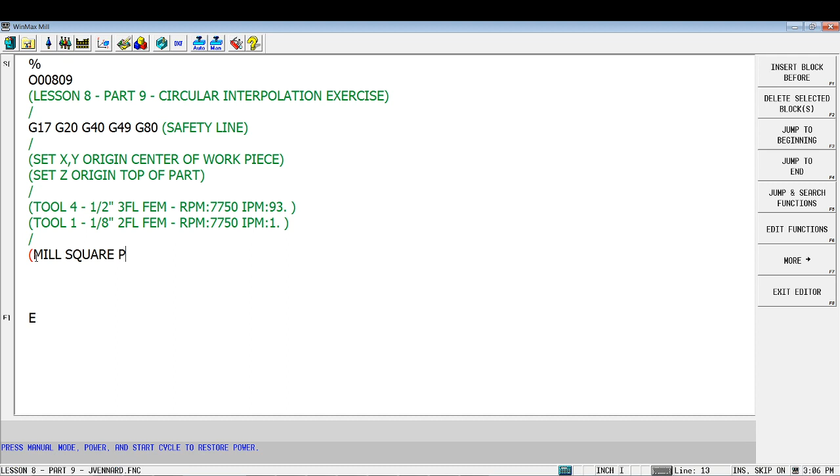Mill square pocket first. We'll just put that, mill square pocket first. For the tool, we're just going to take this tool setup information right here, and I'm going to copy the tool 4 info and paste it there again. And then we'll go ahead and get this tool to the spindle.

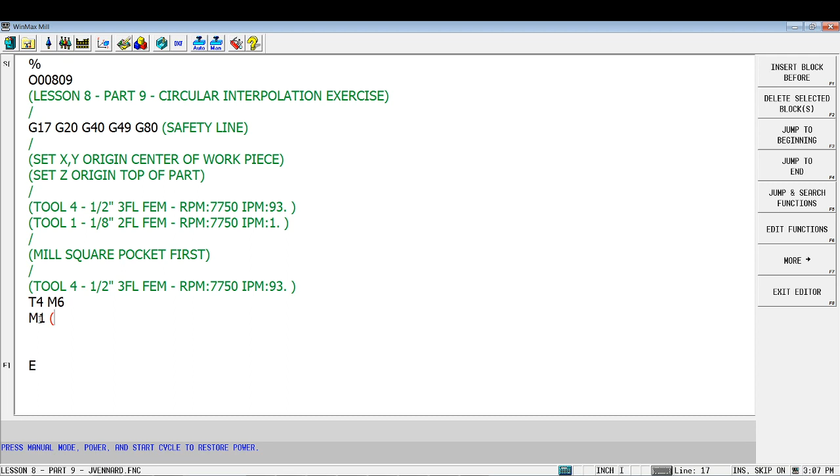T4 M6, right? A T4, that's tool 4 with an M6 telling it, do a tool change, move that to the spindle. We're going to go ahead and do our M1 optional stop, and we're going to verify our correct tool. Okay. You know, the first setup, we always want to take a look and just make sure that tool's the right one for the job.

After we've got the tool verified, now we will go ahead and bring the tool down to a location for a start point. So that being said, let's go ahead and take a look at our plotted out points here for this part. Okay. Here's the contour points. Like I said, we're going to do the contour first, and then we are going to do the holes. So I got my holes up here, I got my contour here. Now this is straight out of the answer key.

Notice that it's got leading zeros in here and there's no point after the zero. And I know some people have reached out to me and said, hey, I didn't put my decimal point. I put it in the instructions. You got to have your decimal there. Okay, the machine requires it, so I require it. So make sure that if it's a 0 is your location, it's 0 point. And any of the rest of them, no trailing zeros. Okay, so like this 0.750, that 0 is not necessary. So we don't need to put those trailing zeros on there, or the leading ones for that matter.

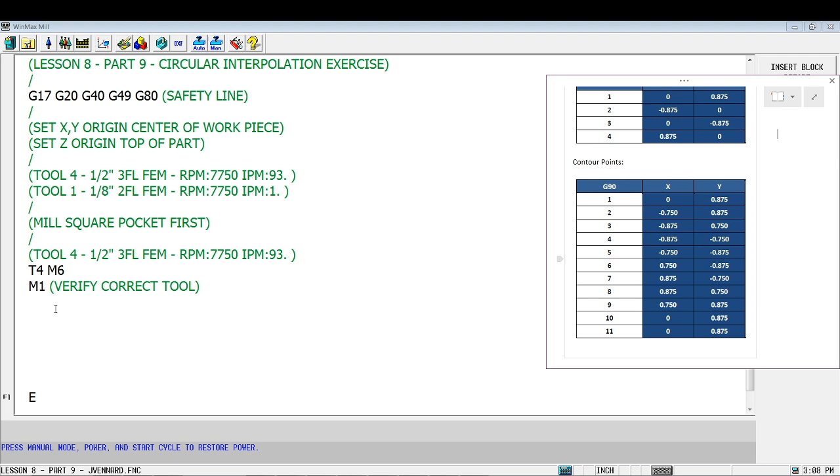All right, so moving forward, what we're going to do is we're going to move to position 1 right here. Okay, that's where we're going. So I'm going to tell it here, I'm going to do a G90, G54, G0 to X0, Y.875. Okay, everybody good there? That's that position 1. That's where we're going to. Okay, going to this point, this position 1 right here. All right.

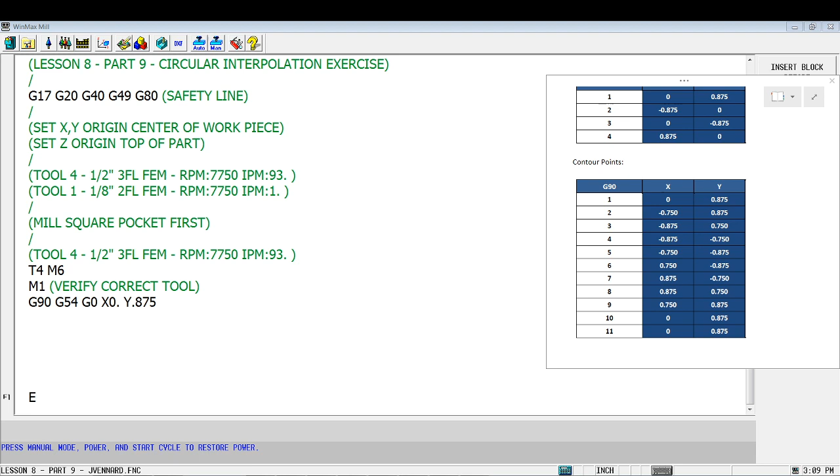All right, so that's going to be a good place for us to check our tool out. So that's what we're going to do there. We're going to go ahead and get to that location. We're going to tell it that this is our start position. And we're going to check our tool. So that's what we'll do now. We'll tell it, hey, we're going to do a G43. What's that? Tool length compensation, right? And along with the G43, we've got to have an H4. Tool 4, tool length 4, H4. So we have to put that in there.

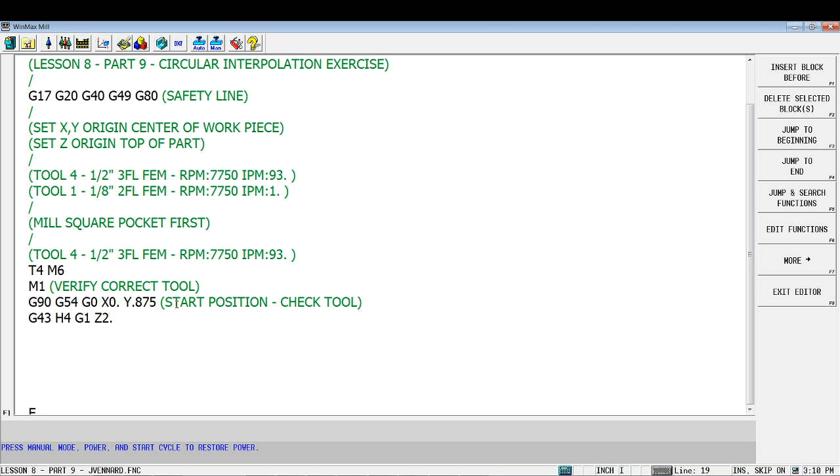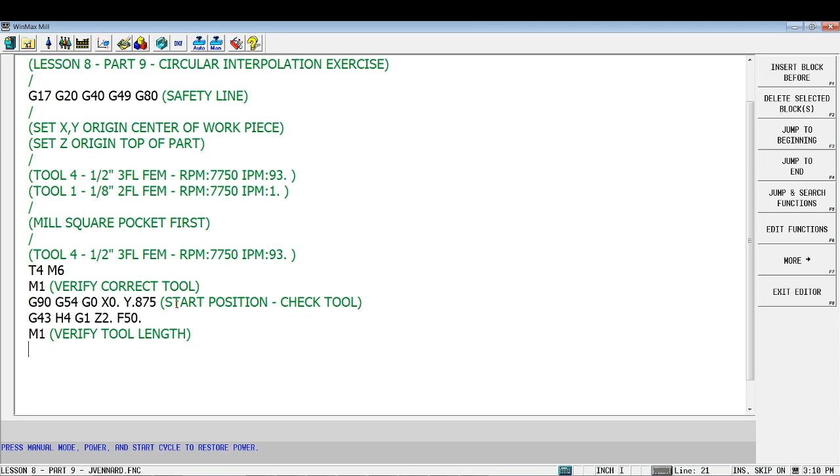We'll do a G1 down to 2 inches above our part, and let's just set the feed at like 50 inches a minute. Then we'll do our op stop, and we'll verify tool length. Okay, that looks good. So once the tool length's good, and we've checked it with our 1-2-3 block or whatever we might use, now we can go ahead and tell it to turn the spindle on. So S7750 M3. That's telling the spindle to turn on clockwise. So that's happening. We're good there.

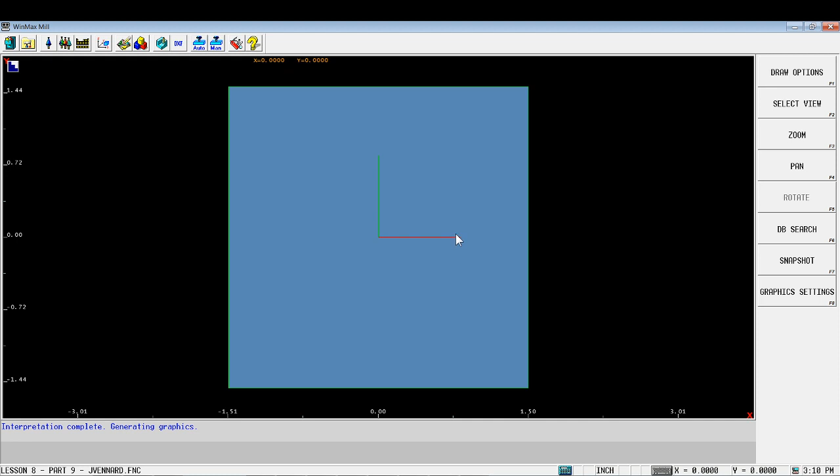We're still above the part, so at this point, even if I go to my draw screen and try to draw it, nothing's happening yet. Okay, we can't see anything. We're just sitting up here above the part right now. That's all we've got going on. But no fear, a couple lines from now, we're going to start seeing some activity. So let's go ahead and we're going to plunge on down to 100 thou above the part and turn on our coolant.

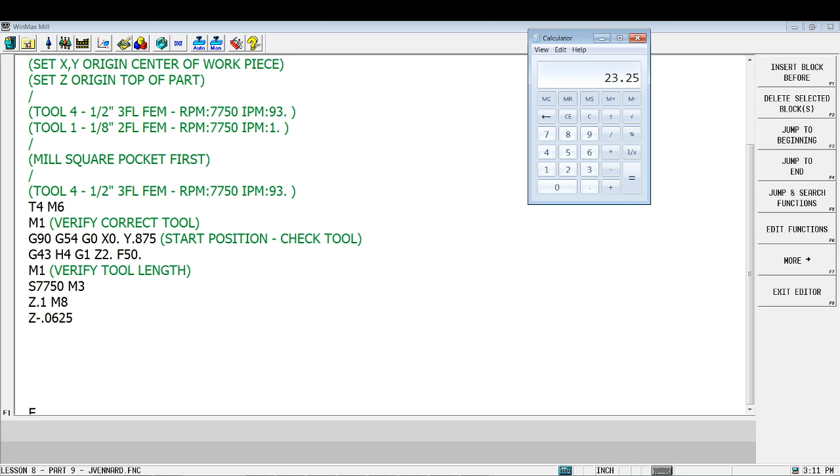And then we will go ahead and plunge to our depth. So we're going to do a Z minus 0.0625, minus a 16th, Z minus 16th. And I'm going to slow the feed rate down. So my rule of thumb for plunging in material, who remembers it? Probably no one right now. So the rule of thumb is your contour feed rate, 25% of that, or 10 inches a minute, whichever one's less. So in this case, 10 inches per minute since 23 is what it calculated to. So I'm going to calculate to 10 inches per minute, and this is just a safe plunge feed rate.

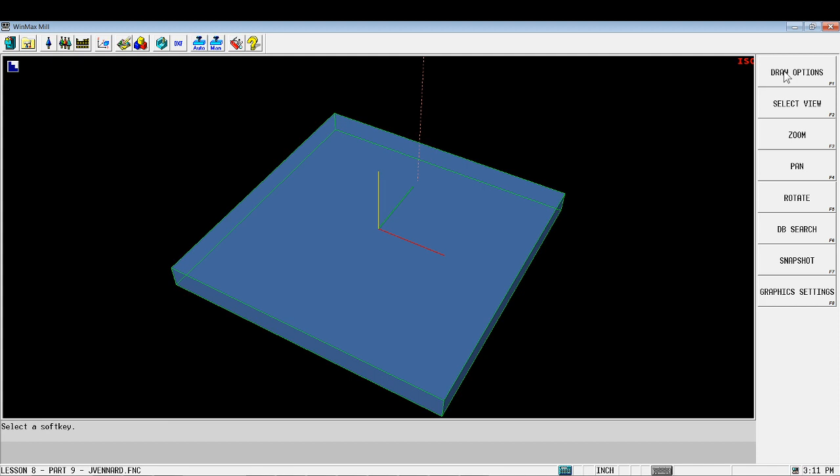Plunge to depth for square contour. Alright, now if we draw this, we should see it has plunged into the part right there, down the 16th deep.

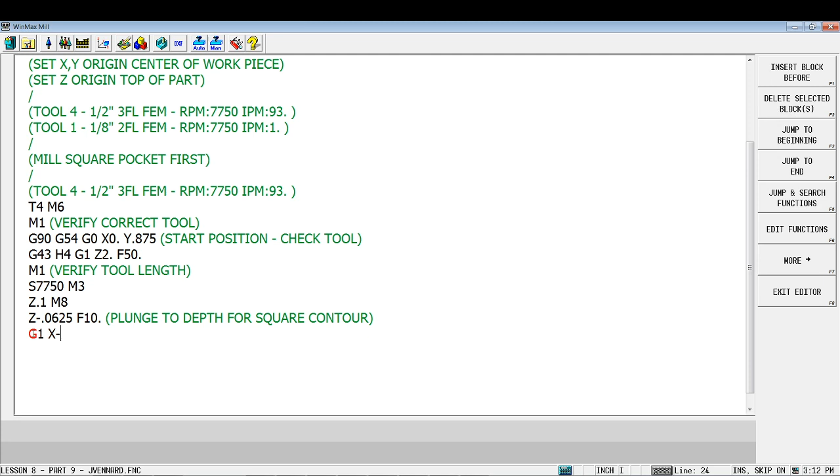Alright, so from here we're basically going to work our way around this part. The next move, we're going straight to the left on this part. If we look at our coordinates, open those up again here. They are basically telling us that we're staying at the same Y, but we're coming straight over to X minus 0.75. So we're doing a G1 X-0.75, and we can bump our feed up to 93.

And that gets us to position 2. Draw that. There's our mill move. Now we're milling an arc, right? We're going to be doing a corner now. If we take a look at our part, we're to this point right here, and now we've got to make this corner. So that's going to be a counterclockwise arc, so a G3. That's what we're going to plug in here.

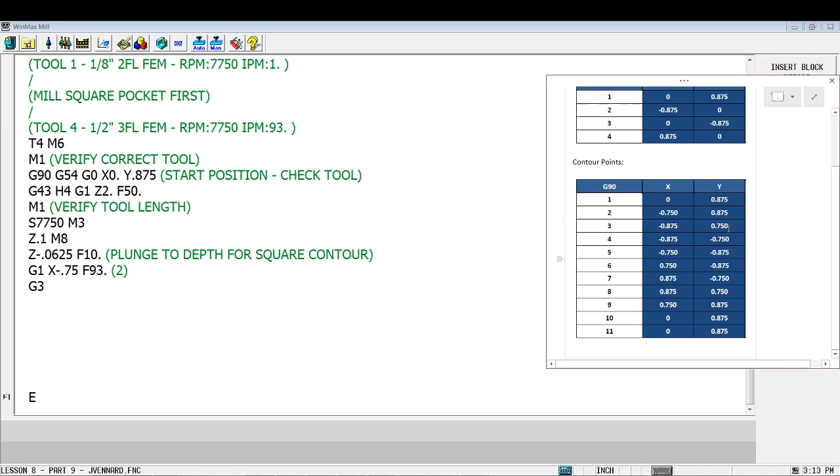We're going to do a G3, going to our next position. Our next position is X-0.875, Y0.75. This is position 3. So X-0.875, Y0.75. And then we need to decide, are we using an I or a J? What's our value here?

Well, the start of rotation, when we look at this part, is up here, and from the start of rotation to the center of rotation, it's in the negative Y direction. That means it's going to be a negative J since it's a Y value. And the amount is basically the radius of the corner minus the radius of our tool, because we're on the inside of the corner.

So 0.375 minus 0.25, the radius of our tool is a quarter inch, so we would subtract that from the actual radius, so it's going to be a J-0.125. J-0.125 here. That's going to get us to position 3. We draw that. There is our corner. Now we need a straight linear move coming down to position 4.

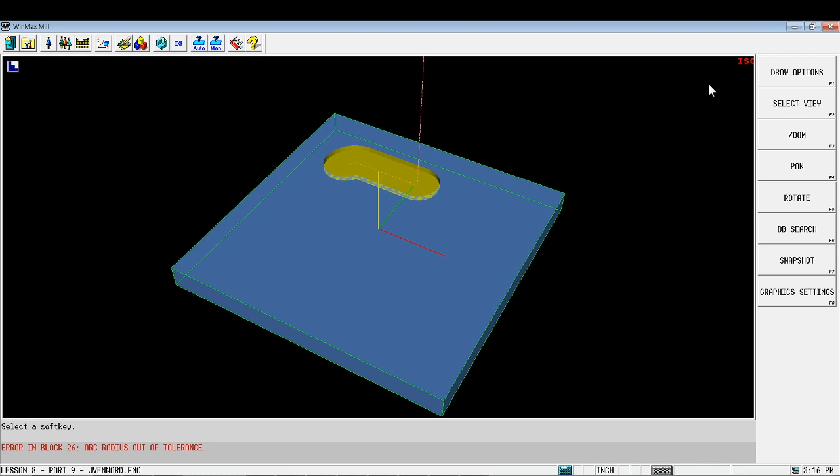So go back to our program, and we're going to have an I0.125 here. Can draw that. And there is our next corner. From there, we're going straight across again. So G1 over to position 6, so to X0.75.

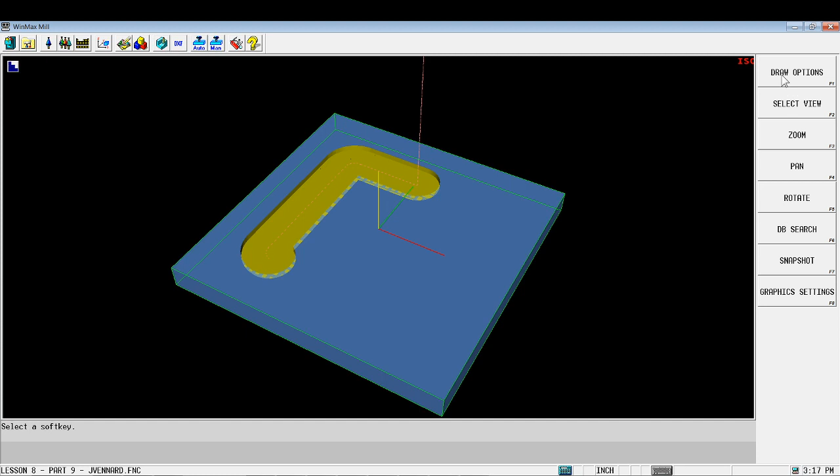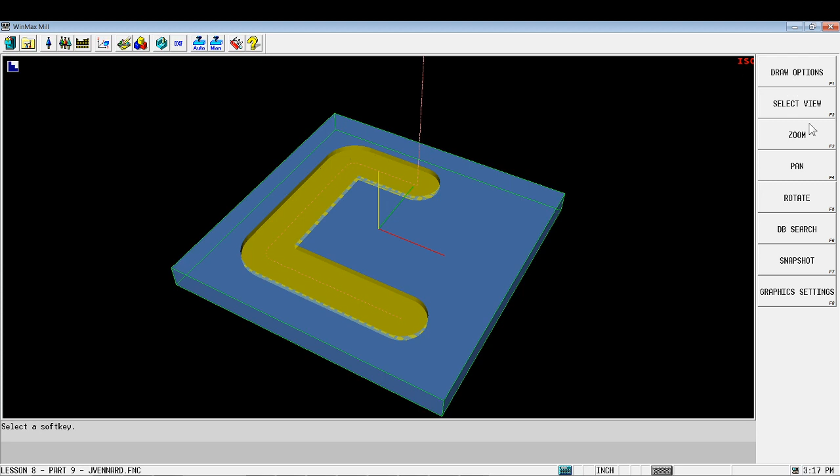There we are. Then we've got another G3 going to position 7, so X0.875, Y-0.75. And this time we have a J0.125 because from the start of rotation to the center of rotation, it's in the positive Y direction, 125 thousandths. So that's a J0.125. Look at that. We should have our next corner in. There we are. Looking good.

Couple more moves. We've got to go back to our G1 here, up to Y0.75. That's position 8. And then another G3 to X0.75, Y0.875. This time it's going to be an I-0.125, because from the start of rotation to the center of rotation, it's in the negative X direction. Since it's the X direction, that's an I. It's a negative, and then the radius, subtract the tool radius, 0.125.

And then from there, we'll do a G1 right back to where we started at X0. And that gets us to position 10. If we look at this, we have our completed square. Okay, so that looks good. Now, pretty much it's just a couple more lines of code to go ahead and mill this now.

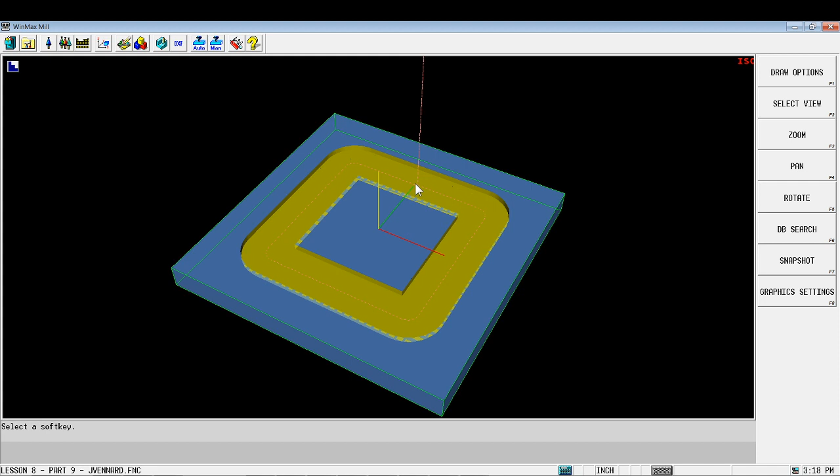So let's go ahead and perform the milling operation for the circle. I guess I should say that. We've already milled the square, now we're going to mill the circle. The first thing we got to do is we got to go on down to depth. So this is going down to G1 down to Z minus 0.125, another 16th deep, and I'm going to slow the plunge feed rate to 10. Plunge to circle depth. If I look at my part and draw this, you see here I've plunged on down deeper into my part. Okay.

And then it literally takes one line of code here. We're telling it a G3 because we're going to go counterclockwise. We're going to start and end at the exact same position so our X and Y's aren't changing, so we don't have to put any of those in. All we've got to do is tell it the direction we're rotating, and we've got to tell it our I or our J value. So let's take a look at this part here.

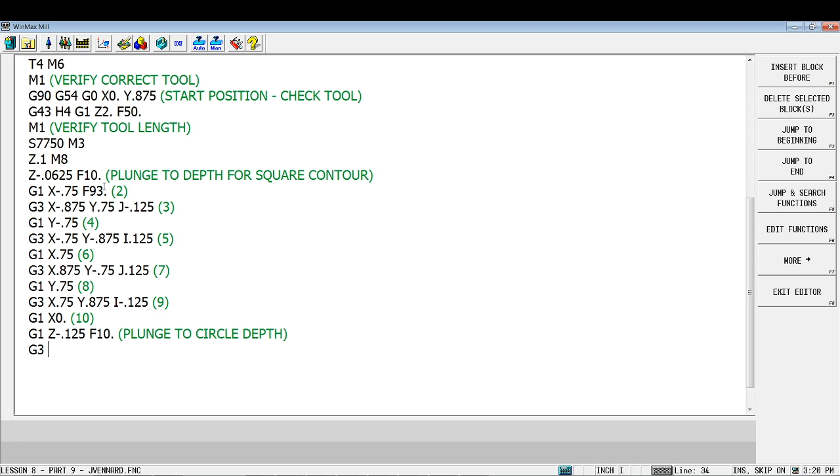We're starting right here. This is where we're at. Okay, so it's from the start point to the center point of rotation. So if this is the start point, and that's at Y 0.875, to the center of rotation, which is 0, it is in the negative Y direction. So it's a J negative 0.875, because that's the distance from the start to the center. 0.875. It's in the Y negative, so it's a J negative 0.875.

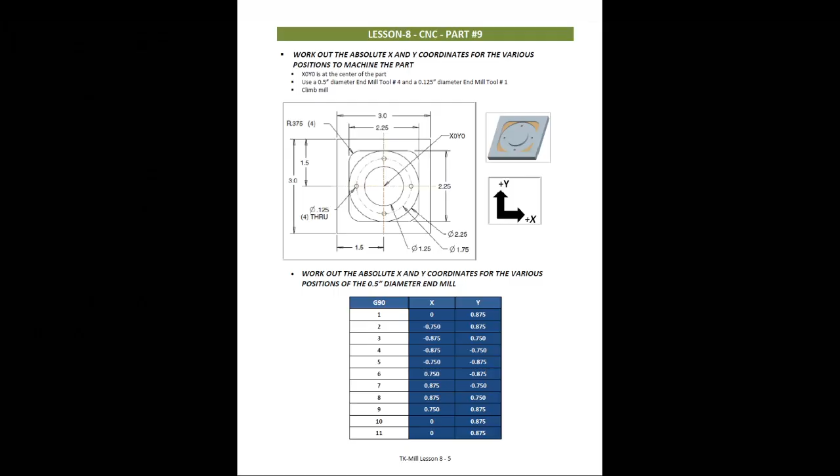You guys don't want to see me again.

All right, so it's a J negative 0.875. And this is mill circle. Now that's the one thing you do need to know. Anytime we do a full circle like this, you can only use I's and J's. Okay, you can only use I's and J's, which is what I want you to primarily focus on right now. Later, I will teach you how to use radius values a little differently, but right now, I's and J's in all your programs. So if we look at this, there's our circle milled.

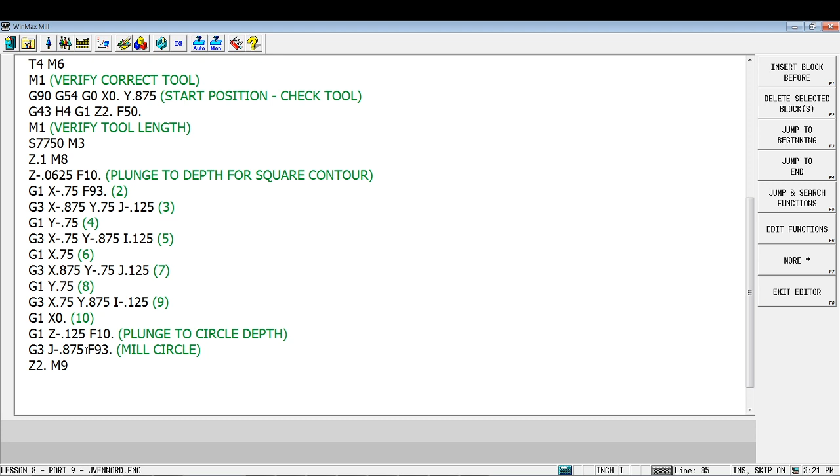Looks good, doesn't it? Now we just got to come up out of the part. So we could also, if we wanted to, bump the feed rate back up to 93 to mill the circle. And then I'm going to tell it to come up 100 thou above the part. And then, actually, let's go 2 inches above the part. And we'll shut the coolant off. And then we'll tell it, let's bring our spindle up to the home position, G28, G91, Z0, and we'll shut the spindle off.

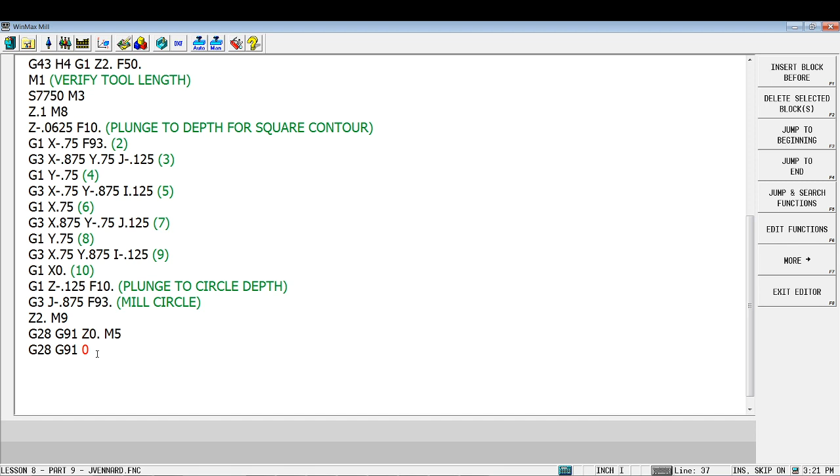And then we'll go ahead and bring this part to us so we can take a look at it. It's going to bring it to the center. Move home through reference position. Okay, so that has our part milled. So we can draw that, and that looks good. And what I would recommend you do now is definitely go up and save your file if you haven't saved it yet, because we're ready to go ahead and plunge the 1/8 inch holes. So let's go ahead and do that.

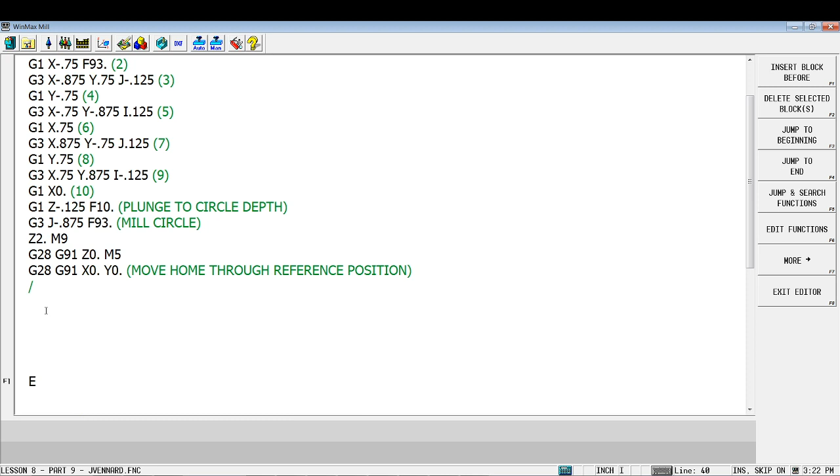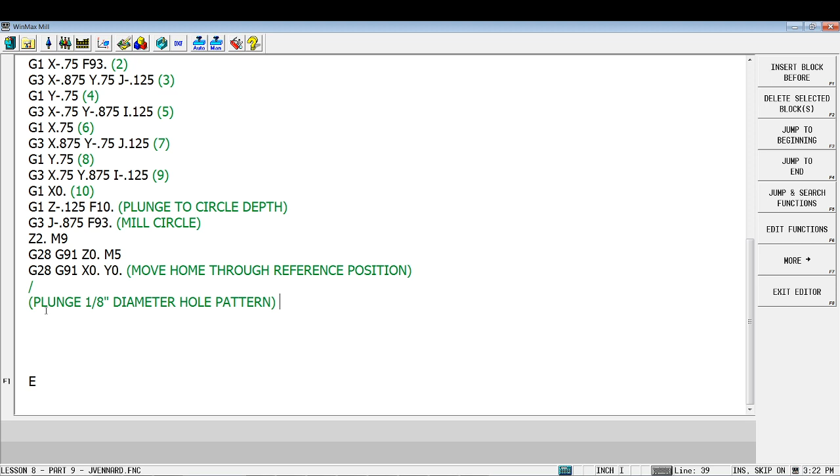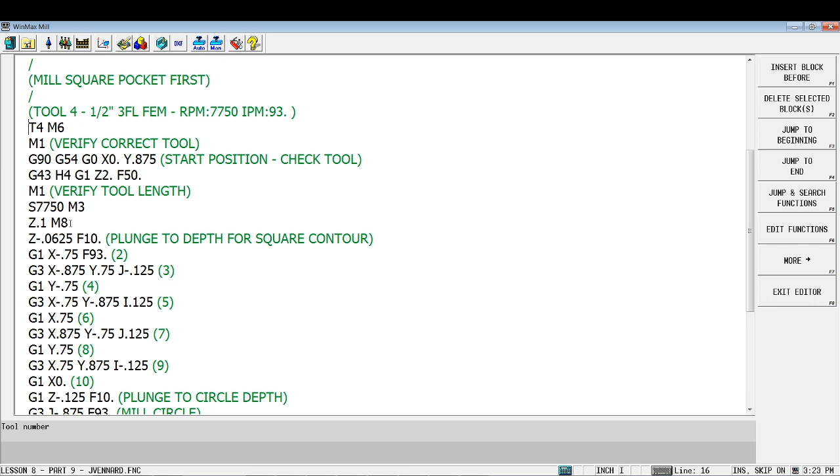I'm going to go back up to my program at the top. I grab tool 1's information. Then I'll come down here and say we're going to plunge 1/8 inch diameter hole pattern. And then we will bring tool 1 to the spindle. So what I'm going to do is I'm going to come up here and borrow all this information down to right here. So I'm taking from tool 4 down to the coolant getting turned on. I'm going to copy that. I'm going to paste that in down here.

Once I've pasted it in, I'm going to modify. So T1 M6, the G90 start position, that's the same spot. That first hole's in that same position, so we're good there. We're at hole 1 position. So I can tell this hole 1 position for the tool check. Now on the tool check line, what do we need to change? Our H value. That's right. So we'll change that to H1.

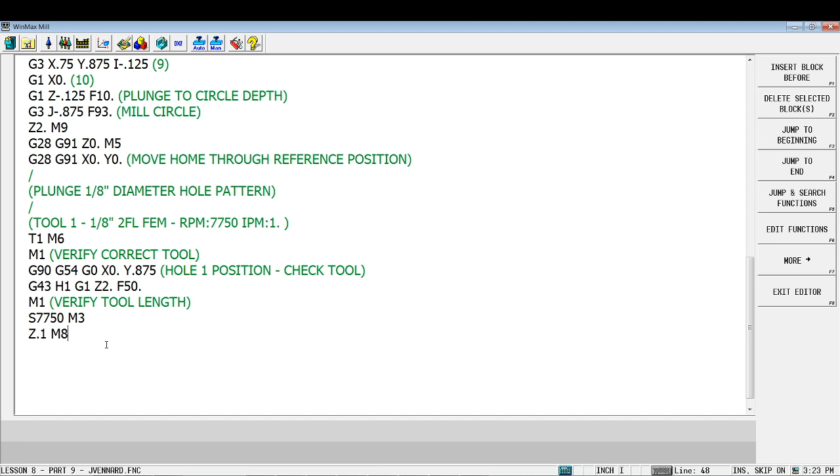It's going to come down and check the tool, and then it comes down to 100 thou above the part, which can also be called the initial height, because we'll use a G98. So in between each hole, it raises all the way back up to 100 thou above the top of the part. If we set our retract really close to the material down in the pocket and it doesn't retract up high enough, you take the chance at clipping the corners of the part as it moves from hole to hole. So we got to be careful with that.

All right, so now that we're at our initial height, we'll go ahead and we'll do that. We'll tell it, hey, we're going to do a G81, and we're going to move to the initial height between holes. So it's a normal drill cycle with the G98.

Once we got that in there, we'll tell it, all right, we need to go through the part, so we can set our Z minus 0.25, I don't know, let's do like 25 thou breakthrough. So we'll do a Z minus 275. Okay, looks good. All right,

now that we've got that, let's go ahead and let's tell it our R plane. I'm going to set the R plane down closer to the material so I'm not drilling from way up above. So I can set my R plane down in the part minus 100 thou, minus 0.1. Because where the holes are drilled, that's already 125 thou deep.

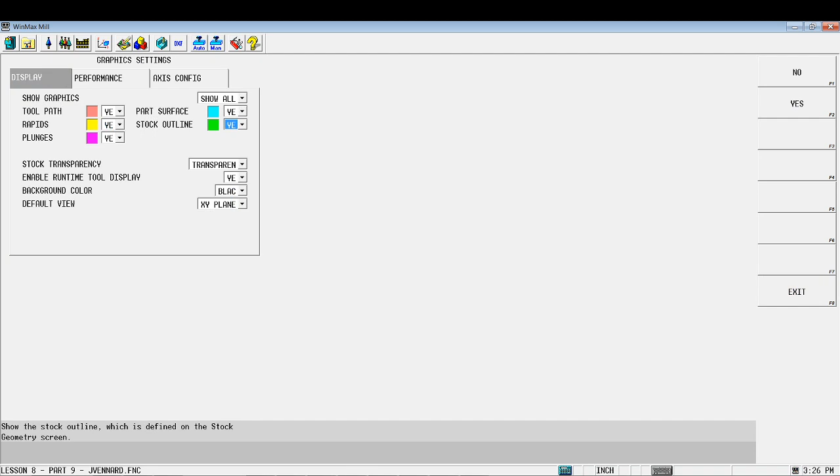Okay, so let's go ahead and add in our other locations. We take a look at our locations. We're going straight over to negative 0.875. Oops, that is an X value. Let's put that in there. X negative 0.875, Y0, hole 2, and then X0, Y minus 0.875, hole 3, and then X 0.875, Y0 for hole 4. Both the X and the Y change each time, so you have to have those in there.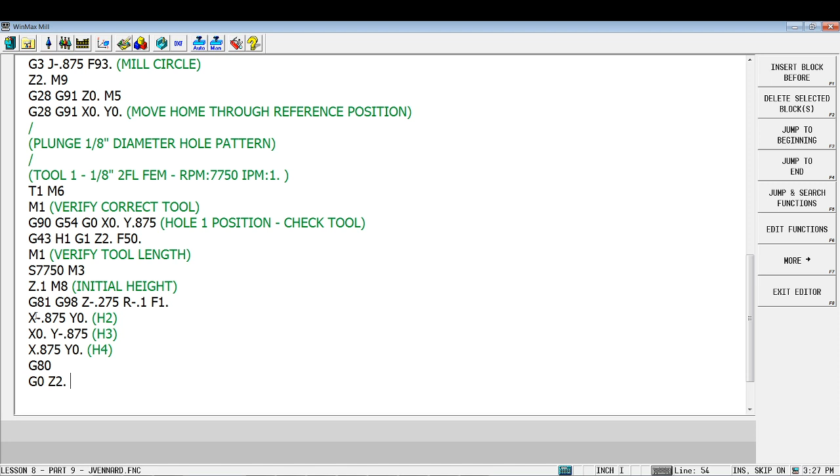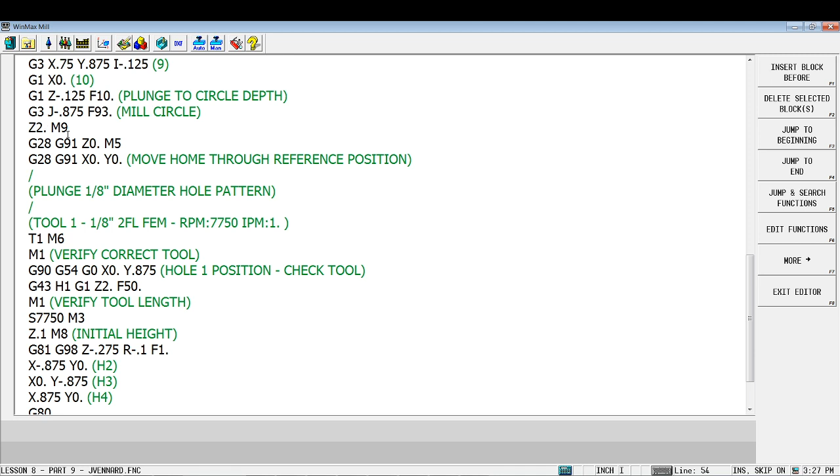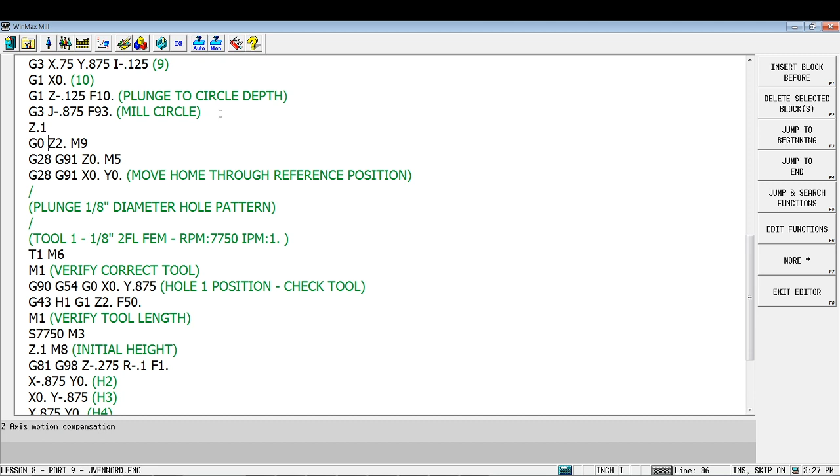And then we can do a G80 to cancel the canned cycle, and then I'll rapid it up above the part, and I'll shut my coolant off here. Okay. Notice up here I did not rapid, and the reason I did that and just fed up to 2 inches above, essentially, and we could do this a little bit quicker. Let's tell it just to go up to Z.1, and then we could rapid it here. But I don't want to rapid it from depth out of the part because I don't want to leave a mark on the part. That's usually what I'm trying to avoid there with that feed move out of the part.

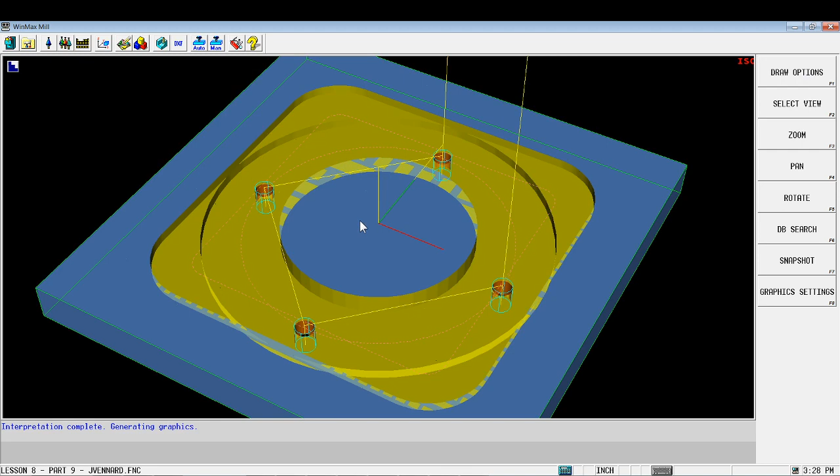So down here, we're ready to wrap this up. If we take a look at the program, we should be able to see all 4 holes drilled. Looks good. You see it's rapiding up above the part between each hole. And that's what I was talking about. If we change this to G99, that's going to say go to the R plane, which is going to be -0.1. And it may not hit, but just out of my comfort, yeah, it does. So you see how close that comes to that wall right there? Okay, that rapids through there.

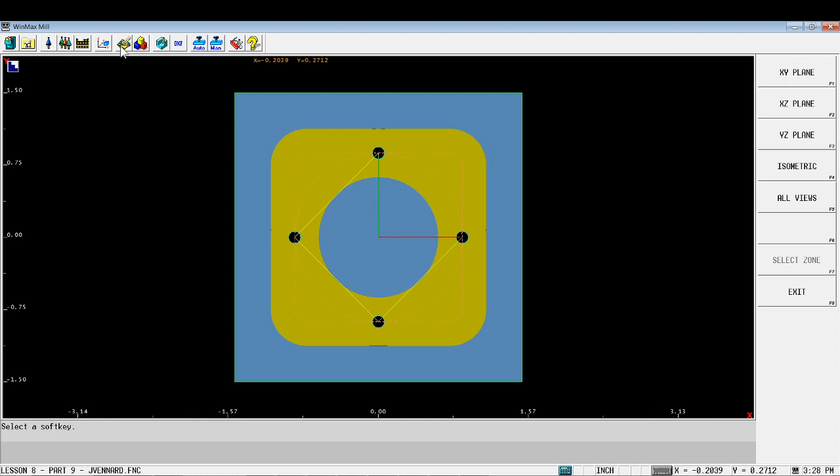That's my 1/8 inch end mill that just got broke. Okay, when it rapids across there with it down in the part, that's my 1/8 inch end mill broke off right about there. It just doesn't show it. I've got to recognize that with the lines as I look at the part. So we want to make sure that's a G98. That way we don't have any collisions.

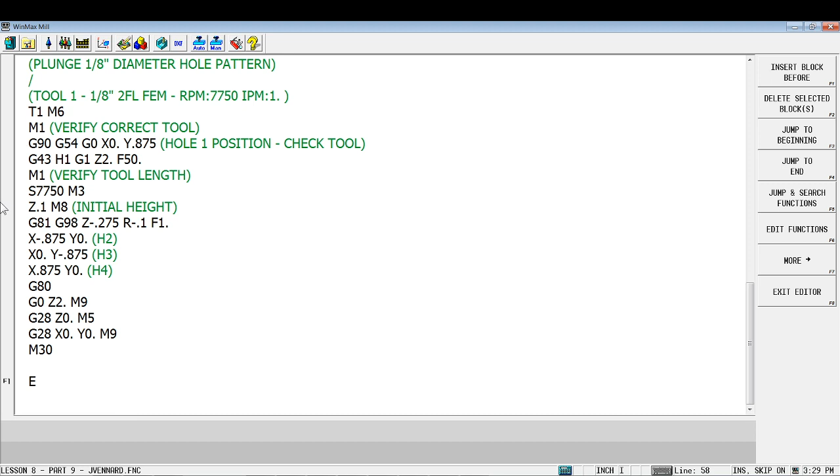Then we'll do our G28, Z0, M5, our G28, X0, Y0, M9, and last thing, M30 at the end of our program. And that is Lesson 8, Part number 9. So double check all of your program, make sure it looks good, make sure you have it saved, and then you can submit this program on Blackboard for grading.